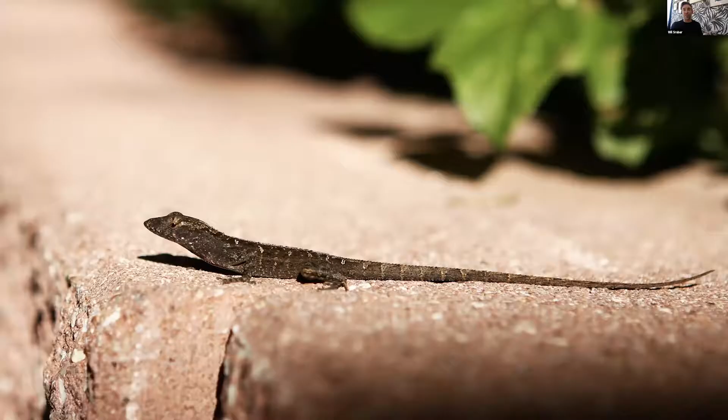I remember chasing lizards and making them shed their tail, so their little wriggling tail would be left behind to evade me, the predator. So I was always very fascinated with nature and how it has evolved these instincts and responses, especially, like I said, in times of these acute crises.

So I had a very rural upbringing, but it was the skyline of Houston that really inspired me to become a structural engineer. I remember going to baseball games with my dad at the Houston Astrodome and just marveling at how women and men can build such magnificent structures. So I was hooked with my first baseball game.

And this really kind of came full circle. One of the first projects I worked on as a practicing structural engineer with Walter P. Moore, which is a structural engineering firm in Texas, was the Dallas Cowboys Stadium. So it was a really nice return to my roots and my inspiration for choosing this as a career.

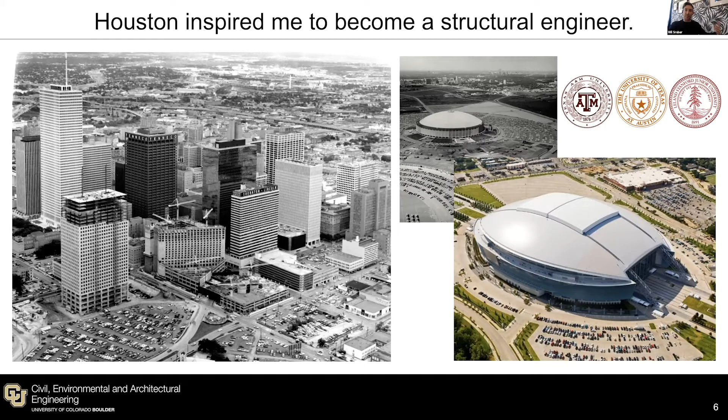When I got a bit older, I moved into concrete jungles. So this was the first time that I really came face to face with other people that didn't have rural upbringings. They lived in cities their whole life, and it was really a light bulb moment for me that I was the generation of my family that urbanized, that moved into cities.

And I just remember seeing, we have this image here of Central Park in New York City too. It came as quite a shock to me that what was the built environment was very separate from what was the natural world. And this is a very clear example. Humans were just so separate from nature, which was quite foreign to me.

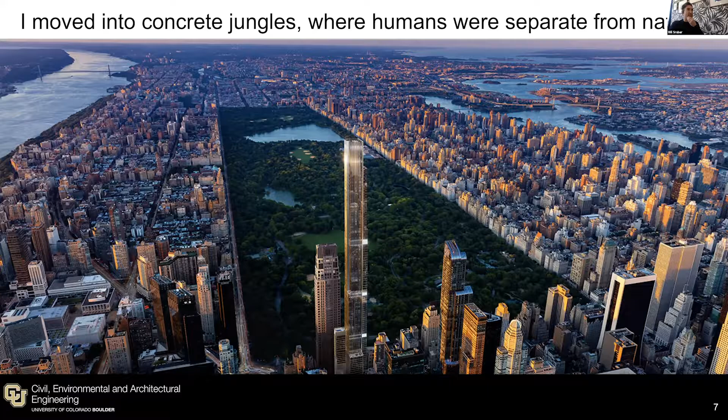So since moving to these cities and beginning my professional career, I've always really questioned that convention. Why are humans so separate from nature? Why do living things grow, regenerate, and adapt, but buildings do not? They're quite static and sterile. And what can we learn from our fellow species?

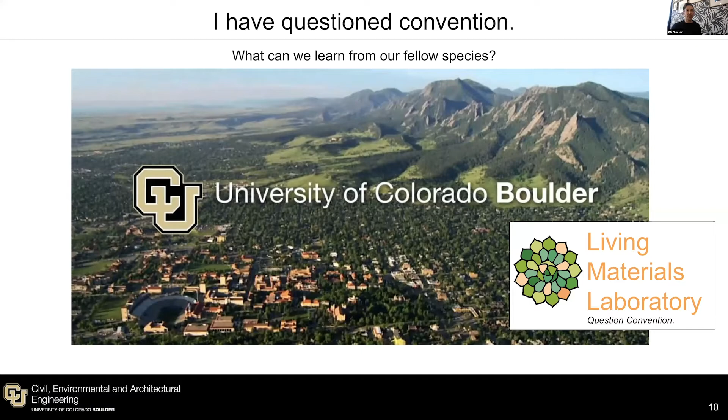So at CU, I founded the Living Materials Laboratory, and my group engineers biomimetic and living materials for the built environment. So we integrate aspects of synthetic biology with traditional polymer and cement chemistry to create responsive, adaptive, living materials specifically for the built environment, so for buildings and for infrastructure.

In order to do this, we work with a variety of very talented collaborators at CU and even beyond CU. And everything I'm going to show you in this presentation, I'm indebted to not only them, but also my students that you see here. My students come from a variety of different backgrounds, from architecture, physics, chemistry, civil engineering, microbiology.

And of course, this brings not only opportunities for inventing new materials, but also a variety of different challenges with communication, with perspectives, and really being comfortable with failure. I really owe it to my students for coming on this journey with me. We confront failure every single day in the lab, and occasionally we're quite successful, which is really exciting.

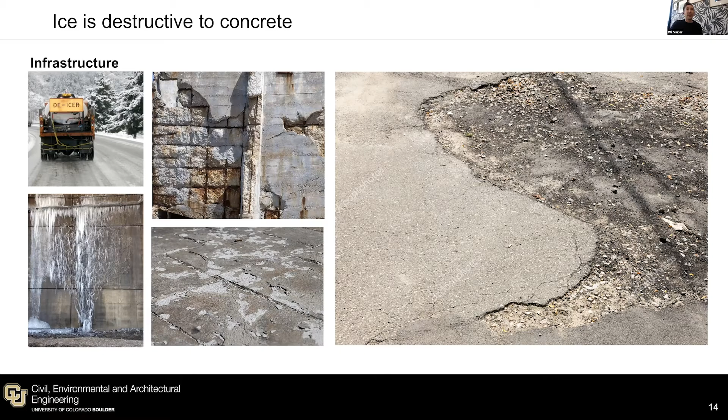Now, there are current prevention methods, but my lab views these as very non-optimal. For the better part of a century, we have put tiny little air bubbles in concrete to alleviate the pressure that builds up when water starts to freeze and ice expands. These are called air entraining agents. And this technology hasn't really changed in the last 70 years.

So if you were to look at concrete under a microscope, you'll be able to see these tiny little air bubbles that have been entrained throughout the microstructure, again, to alleviate that pressure.

So these air entraining agents are really good at alleviating this pressure, especially if you have more than 5% of air entrained in your concrete. It does really well. And so for freeze-thaw climates like Boulder, like Colorado, where we see a lot of freezing and thawing, this works quite well, but it has some downsides.

Number one is that air cannot carry load, so it inherently weakens the concrete. Number two, which can be of concern for departments of transportation, is that when you put in the admixtures to make the air bubbles, it can increase the time of set of the concrete and delay construction. And the biggest one, number three here, is that it increases the permeability of concrete.

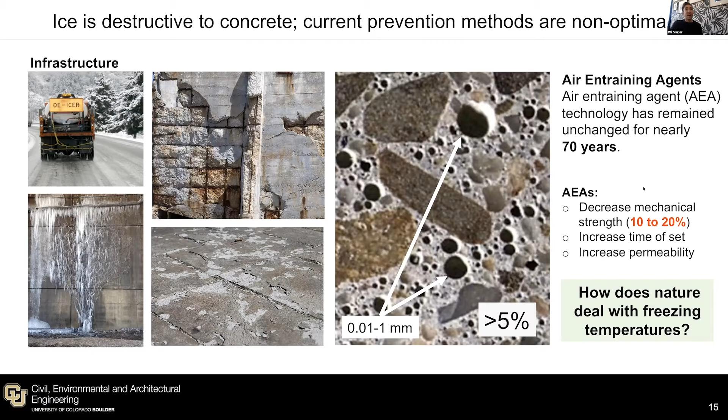We took a step back and said, okay, how does nature deal with this problem? We took inspiration from what are called ice-binding proteins. Now, ice-binding proteins are a class of proteins that are naturally occurring. They are found in a multitude of bacteria, fish, plants that thrive in sub-zero temperatures. And so what these organisms do is that they produce these proteins, and when an ice crystal nucleates inside of them, the protein binds to its surface to keep the ice crystal really small.

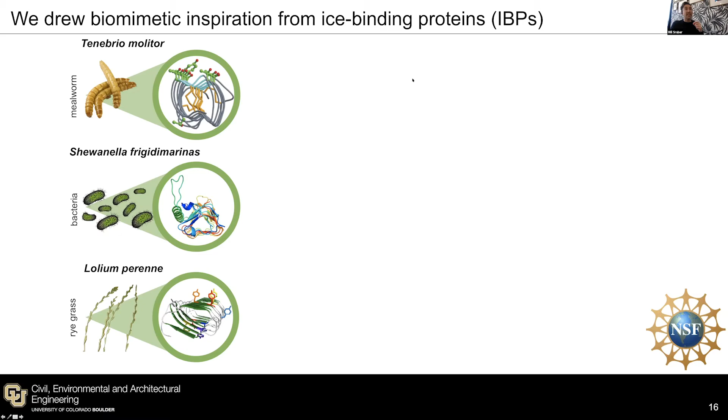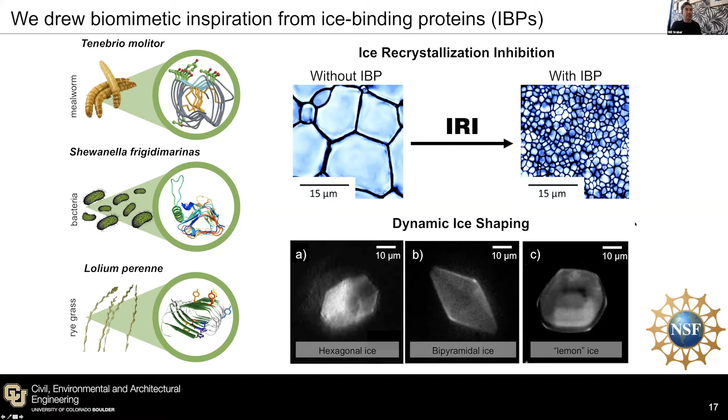The second mechanism we can observe is that when these ice binding proteins bind to the surface, they can change the shape of the ice crystal. So we get these really cool bipyramidal ice, or in most cases, with most proteins that we're looking at, we get this lemon-shaped ice, which is indicative to us that it is in fact interacting with that ice surface. So this is great. Why don't we take some protein and put it into concrete and see if it keeps the ice crystal small and non-destructive.

If you know anything about biology, proteins can get very unhappy when you take them out of their native environment. So a normal protein looks like this nice coil; it has primary and secondary structure, beta folds and beta sheets, and it can have some helices. But when you put it in a non-native environment, it can unravel and denature and even disintegrate. And some of those denaturation agents are things like pH. If you increase the pH, or temperature, or ionic strength, proteins get very unhappy.

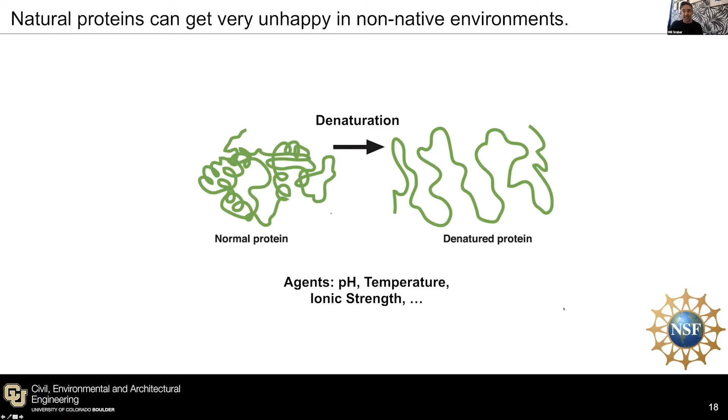If you know anything about concrete, you know that if you squeeze concrete and a drop of liquid comes out, the pH of that solution is about 12.5 to 13. It's very, very basic, high ionic strength. And so we thought, well, proteins probably won't be very happy in that environment, but we tested it anyway. So we took simulated pore solution of concrete, and we tested whether or not an ice-binding protein has this IRI, this ice recrystallization inhibition activity.

So this is the data that you would get. This is for a pH 8.9 solution without any protein. So what we do is we take a drop of solution from a prescribed height, we flash freeze it to get a very thin monolayer of ice. We put it on a cold stage and we watch the ice crystals.

And we can see the ice crystals at the very beginning, they're very small, and then over time grow into larger crystals. And so this is a sample, like I said, without any protein. So we see what we would expect to see, that larger crystals grow at the expense of smaller ones. And so this is just blank solutions without any protein.

And so we saw what we would expect to see as we increase the pH to higher and higher pHs, and we saw this ice recrystallization. When Elizabeth was my main PhD student on this project, when she loaded the sample with an ice-binding protein from an Antarctic bacterium, what we saw was pretty exciting: after 30 minutes, the ice crystals remained small, indicating to us that this protein maintained activity at pH roughly 9.

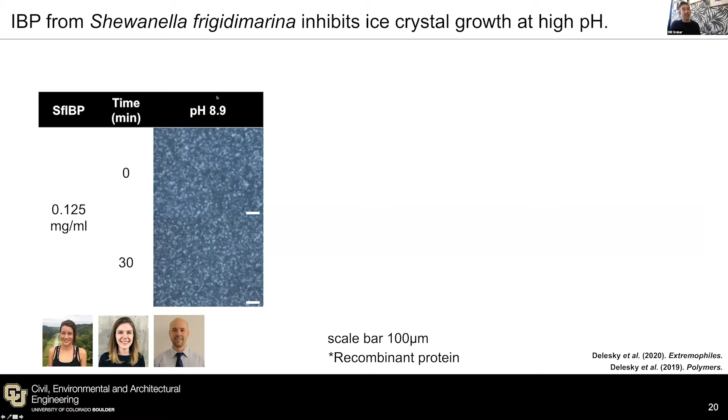We were exceptionally excited to see it maintained that activity at pH 12.4, pH 12.7, but then after we reached a certain threshold, what we proved in these papers is that the protein unraveled and then it disintegrated because the pH was so high. We also tested another ice-binding protein that we thought would be a little bit more effective in this calcium-rich, high pH solution, but we found the same thing.

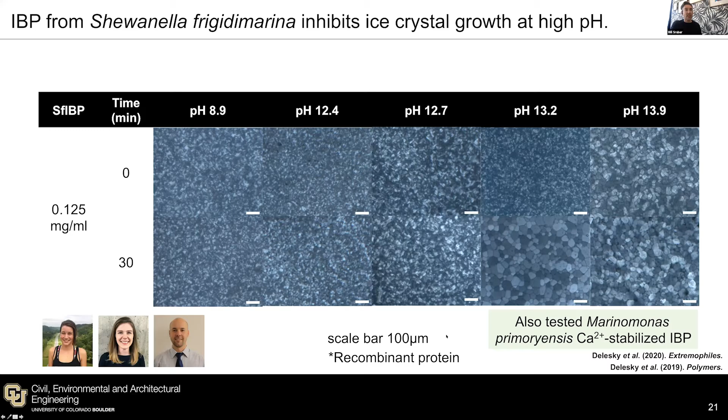So, even though it worked up to a pH of 12.7, it's still expensive. So we knew that this couldn't be a viable option to put into concrete. So we turned to biomimicry instead. So we looked at polymeric molecules that display the same ice recrystallization inhibition activity as the proteins. And in the literature, we found that polyvinyl alcohol was a polymer that displayed this activity.

The issue with polyvinyl alcohol was that it had really low solubility in water at high pH, which would not work out well for us. And it has what is called a high cryogelation potential, meaning that if you freeze and thaw it, it forms a hydrogel and wouldn't behave the same way as it would just dissolved in solution. We took note of PEG, polyethylene glycol, that had the benefits that PVA did not. The only downside with PEG was that it was not IRI active.

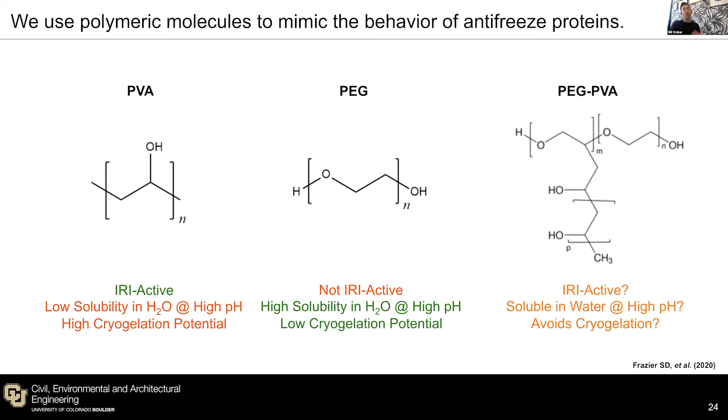So we thought if we combined the two into a copolymer, we would either get the best of both worlds or the worst of both worlds. And fortunately, because I'm highlighting it, we did get the best of both worlds. So we did prove, and I'll show you some data, that PEG PVA is IRI active at high pH. We can dissolve it in water, and it gets us the performance that we wanted. So PEG PVA displayed IRI activity, not showing the dynamic ice shaping, but it did that as well in these really high calcium-rich pH solutions, pH 13 solutions.

So over here on the left, we have a control sample after 30 minutes of incubation on the cold stage with no polymer dissolved in solution. And you can see the ice crystal grains are actually quite big. PEG alone at a low concentration and a high concentration didn't display this ice recrystallization inhibition, but PVA at low and high and PEG PVA at low and high concentrations did. And it kept the crystal size more than 50% smaller than the blank, the control solution. So we were really excited about this.

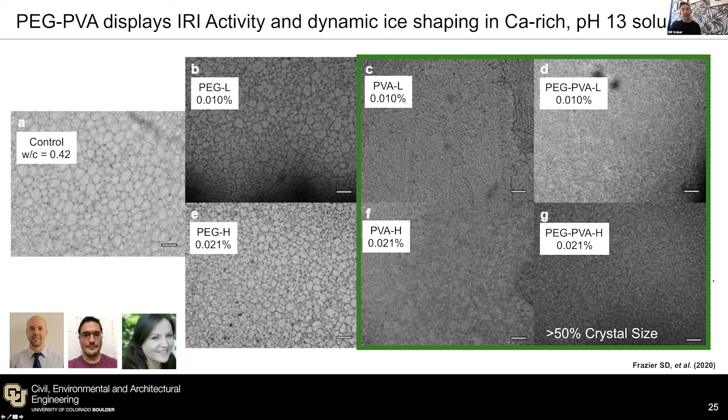And thought, okay, well, let's go ahead and put this molecule in cement paste and see if it resists freezing and thawing. So these are the results. These are microcomputed X-ray tomography images, basically an X-ray cross-section of cement paste samples that underwent freezing and thawing for 30 cycles. So on the left-hand side is the sample without the molecule. And then again, these samples here are with the molecules at low and high concentrations.

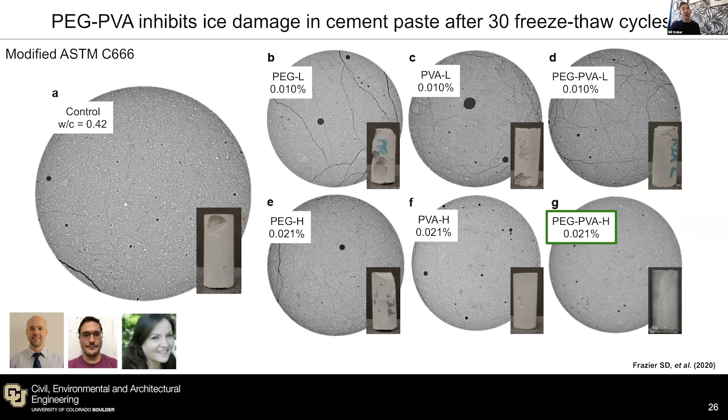And what we were really excited to find was that PEG PVA, when added at a slightly higher concentration, did exhibit enhanced freezing and thawing resistance compared to the control samples and all of the other samples that had the molecules in them. So this indicated to us that we should go ahead and scale this up to full-scale concrete, which is what we did. So does biomimetic PEG PVA prevent freeze-thaw damage in actual concrete? Mo, my PhD student, and Shane recently found the answer to this question.

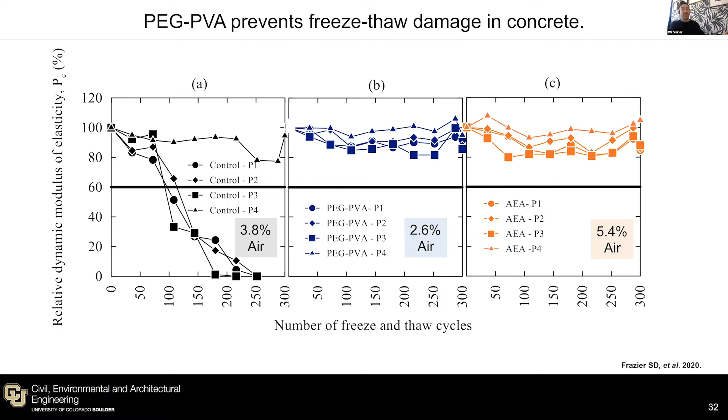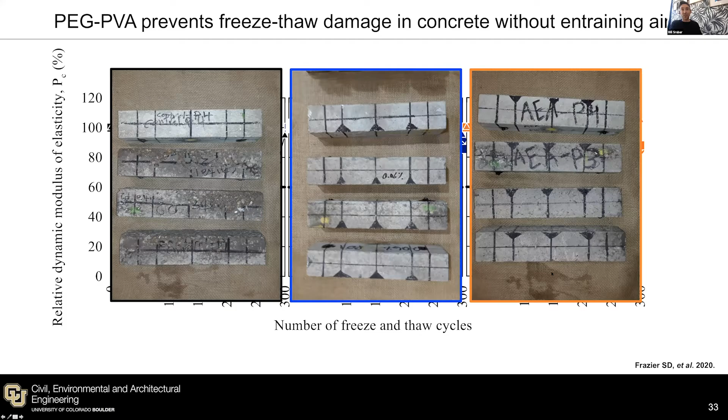We're really exceptionally excited about not only the applications of this technology to concrete. Oh, by the way, these are kind of the visual images of the samples where you can kind of see our PEG PVA concrete really looks identical to the air entrainer. I'm going to skip this really quickly.

But we're really excited about applications of this technology to other industries. So food security, where we're having to store our food, warfighter performance in very cold climates, energy applications, creating anti-icing surfaces for enhanced efficiency of wind turbines, and even medicine. So when we cryopreserve organs and tissues, et cetera, freezing is certainly an issue in all of these industries.

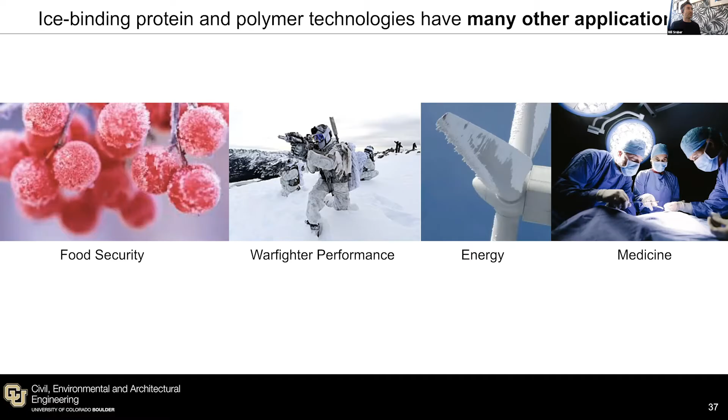The next project I want to highlight is our work with programming biology to make materials for us with very tunable properties. Now, the impetus of this work came about as my group was reviewing self-healing concrete. Many of you may have come across self-healing concrete in the literature, but microorganisms have been put into concrete to impart a self-healing characteristic.

So the idea being that these microorganisms that undergo biomineralization, they make minerals, primarily calcium carbonate, that, when a crack forms, if these organisms are inside of the concrete, they would generate calcium carbonate and they would seal the cracks. There's an issue with this because concrete's a very aggressive environment, like I already said beforehand, and the microbes don't always survive at levels that we would need them to survive if we want them to be viable for decades.

But again, this concept of using microbes that biomineralize has been applied to the self-healing concrete field. It's also been applied to stabilize soils, and it's also been applied to densify recycled aggregates. So if we bust up old concrete and we want to use it as the rocks in new concrete, some researchers had looked at using microbes to help biomineralize and densify that aggregate to improve the aggregate quality.

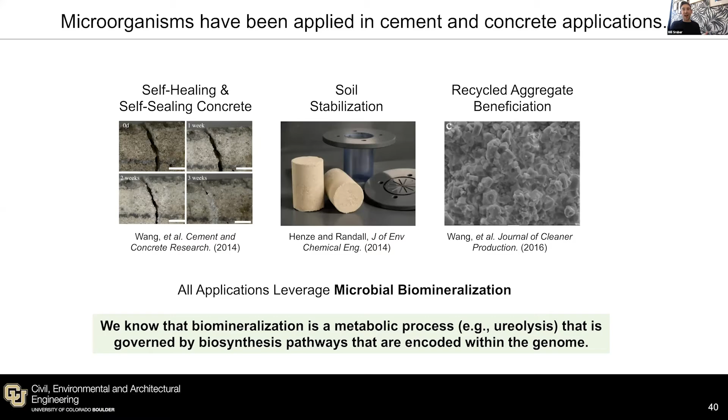Again, taking a step back, all of these applications leverage this process of microbial biomineralization. And we have, up to this point, relied on wild type bacteria that do this normally out in nature to perform this activity in these applications. But we know that biomineralization is a metabolic process that is governed by the biosynthesis pathways that are encoded within the genome of that organism.

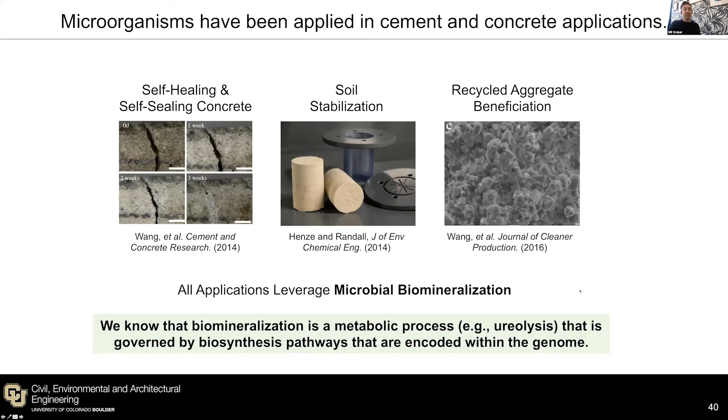So there's this grand opportunity for us that if we understood the genome sequences that enabled better mineral properties, we could really use that to our advantage for these and other applications. So yes, I'm talking about genetically modified organisms, but not for food production, but for engineering them to produce materials for us. So to do that, we have to sequence a genome and understand the genome.

And fortunately, the cost and time of sequencing a genome has plummeted over the last few years. And I'm just comparing this to Moore's law. Many of you are familiar with Moore's law, that processor speeds will double every 18 months. And just comparing that to the cost of sequencing a genome, it doesn't even follow Moore's law. It was much faster at reducing the cost over time.

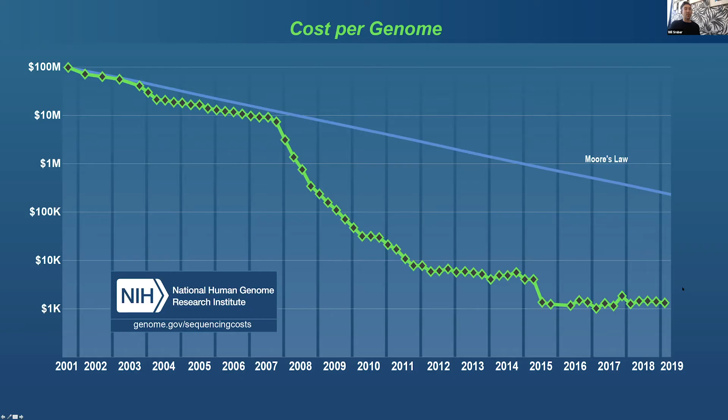So what this tells you is that, for a couple $100, we can have the genome of virtually any organism on Earth. And so it's now feasible to decode the genome. And now that enables us to design fragments of DNA to infuse those into organisms to make better materials for us. So since this discovery and since the plummeting of the cost of sequencing a genome, synthetic biology toolkits have really enabled biofabrication of a variety of bioproducts.

The definition of synthetic biology as a field is a field of science that involves redesigning organisms for useful purposes by engineering them to have new or enhanced abilities. Up until this point, organisms have been used to make fuels or chemicals, even pharmaceuticals. So most insulin is made by hijacking the metabolic process of microorganisms to get them to produce insulin for people with diabetes to use.

And only now are we really scratching the surface with how can we harness these processes to make better materials for us. A lot of companies have sprung up trying to use synthetic biology and microorganisms to make a variety of different products. I'm highlighting Bolt Threads and Ecovative, who are looking at making building materials, so applications to the built environment.

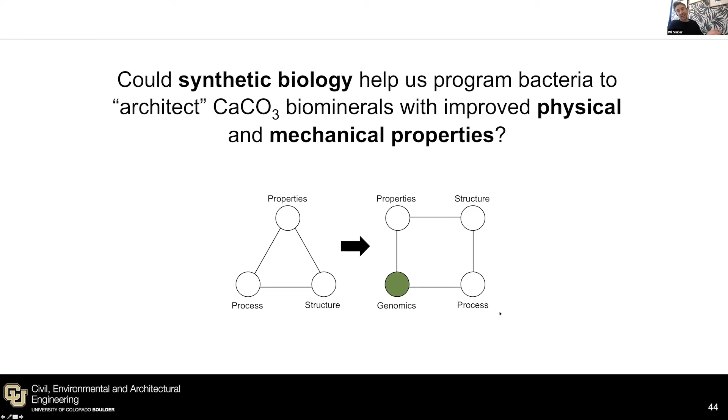So my highly interdisciplinary collaborators and I asked a question. Could synthetic biology help us program bacteria to architect different biominerals with different physical and mechanical properties? So can we really biologically architect minerals by controlling the DNA? And what we're getting at is moving away from the classic material science triangle of processing, structure, and properties, really infusing genomics and DNA manipulation into that entire process.

So we conducted an experiment with a native biomineralizing organism, S. pasteurii, which has been used a lot in self-healing concrete literature. And then we engineered 2 strains. So working with my very talented collaborators, we took E. coli and we integrated either a single copy or multiple copies of the urease gene cluster, which ultimately governs biomineralization in these ureolytic organisms.

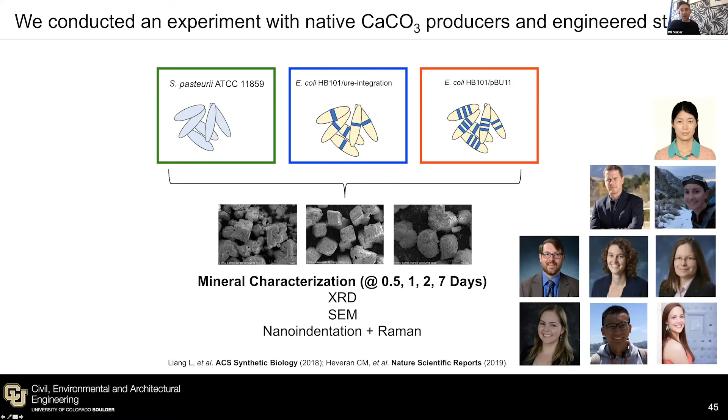So we imparted that ability to E. coli, and we wanted to look at the differences in the DNA. So, is putting in multiple copies of that gene cluster better, or is a single copy better, and how does that compare to a regular native producer? So we grew these in their respective media conditions. They made minerals, and then we looked at the minerals and we analyzed them.

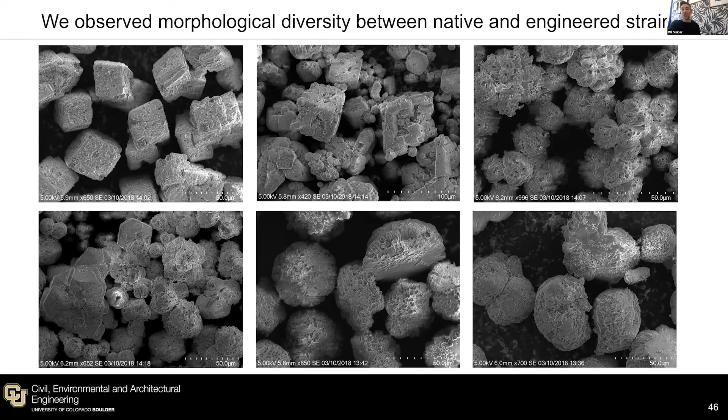And what we found was just this crazy morphological diversity between the native and engineered strains in terms of their ability to architect different minerals. So from very rhomboidal to very globular, and the sizes of the crystals also varied. So what we ultimately concluded was that genetics, nature certainly plays a role in the size and shape and even the mechanical properties of these minerals.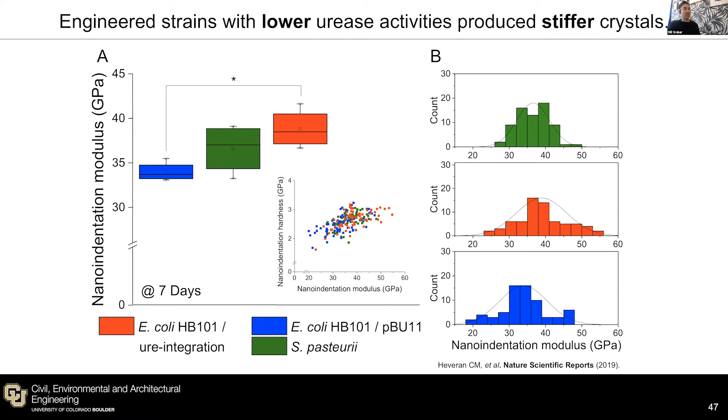This finding was really intriguing to us since it speaks to the potential of genetically encoding the architecture of building materials and even possibly buildings into the DNA of organisms. Of course, we have a long way to go, but nature creates these very complex, hierarchically ordered materials. Just think of seashells and coral. And for the first time, we are now able to harness that potential and control the hierarchical growth of those materials by manipulating and controlling the DNA. Again, it might seem like science fiction, but the reality is a lot closer than one might think.

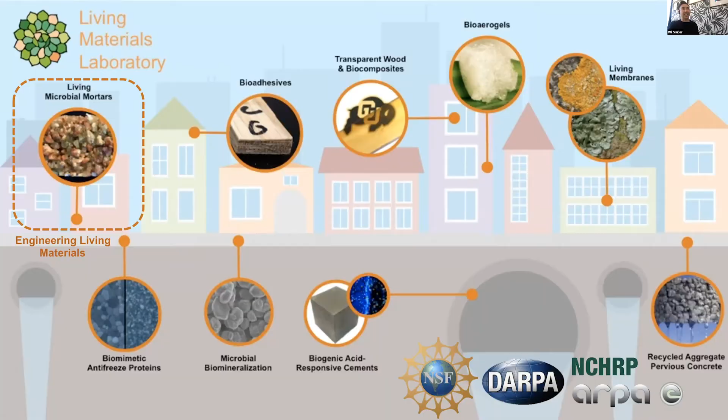So the final project I want to highlight is very related, and it's our work in which we are bringing building materials to life. So my lab and my collaborators started to rethink self-healing concrete. Like I said, self-healing concrete is a concept in which we take regular concrete and we put this biomineralizing organism into that cementitious matrix. But that harsh environment is not conducive to prolonged cell viability. And in fact, no researcher has been able to prove that more than 10% of the initial inoculum of the bacteria survives more than 7 days.

So it doesn't seem like concrete, which we expect to last decades, if not a century, today, that this is a viable path forward. So we asked, could we leverage these biomineralizing organisms to create an engineered living cementitious composite by giving it the right environment by which to thrive, to make minerals, and even survive?

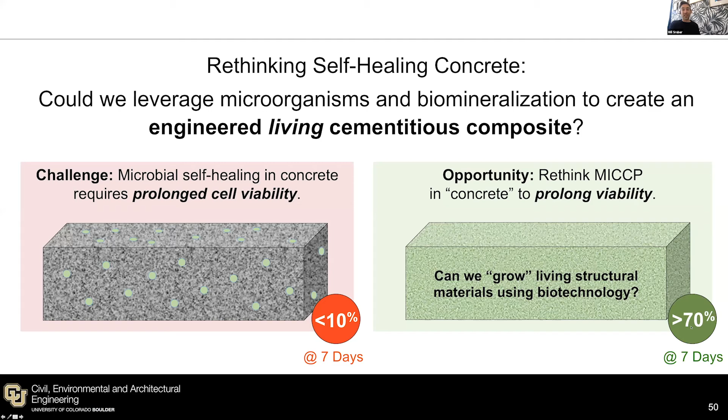So our goal was to grow a living structural material using this biotechnology and to keep it alive, have more than 70% of the initial inoculum survive at 7 days and longer. And this is what we came up with. So we took biomineralizing bacteria and we encapsulated it within a sand and hydrogel scaffold. And how we did this was we took sand, hydrogel, the media that the organisms need and the cells, and we mixed it all together.

And inside, as these organisms were growing, they were precipitating these biominerals that were helping to cement the sand particles together. There was also this hydrogel that was helping to keep all of the moisture inside of the material, especially once we cooled the material from an elevated temperature. Cells generally like to grow a lot faster the higher the temperature. But once we cooled the material, we formed kind of a jello around the cells that had all of the minerals inside of it and the sand.

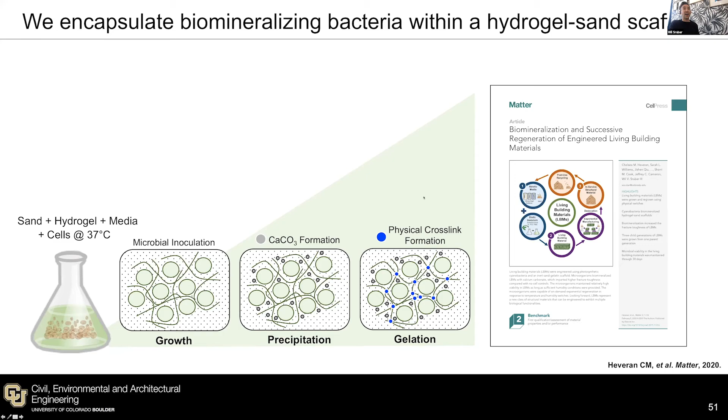And by the way, this is published in the journal Matter, if you want to read a little bit more technical details about it. But this is what it looked like. So this is post-gelation, right when we popped it out of the mold. And this material is just teeming with living bacteria that biomineralized inside, in between the sand particles. And then we were able to control the desiccation of that material and impart better structural properties with decreasing humidity. So there was this trade-off with keeping it gooey and squishy and keeping the bacteria alive versus drying it completely out and getting really good structural performance.

We're able to make very large samples. By the way, this work was sponsored by DARPA, so that's why there's some propaganda with this brick. But we are able to make very large samples, and we can make virtually any shape and any size. And I'll show you some more examples of this.

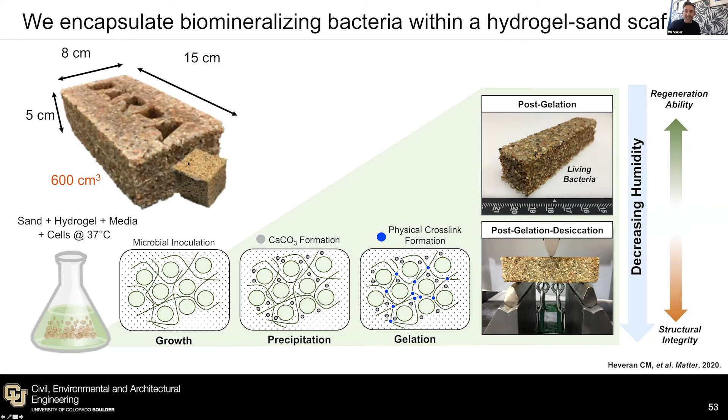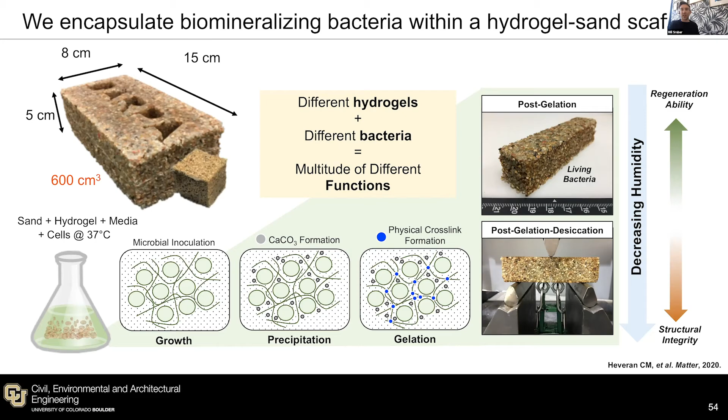But if you, again, take a half a step back and now view this material as a platform, what's exciting is that different hydrogels and different bacteria that we can encapsulate could impart a multitude of different functions to otherwise inert building materials. So one thing that we've been playing around with was encoding secret messages, because certain bacteria will fluoresce under different types of light. And so if you pattern them appropriately, you can start to display secret messages that can be interpreted under different light conditions. Or you could impart bacteria that sense and respond in other ways, maybe sense chemicals or toxins in the air and then impart something back to neutralize it.

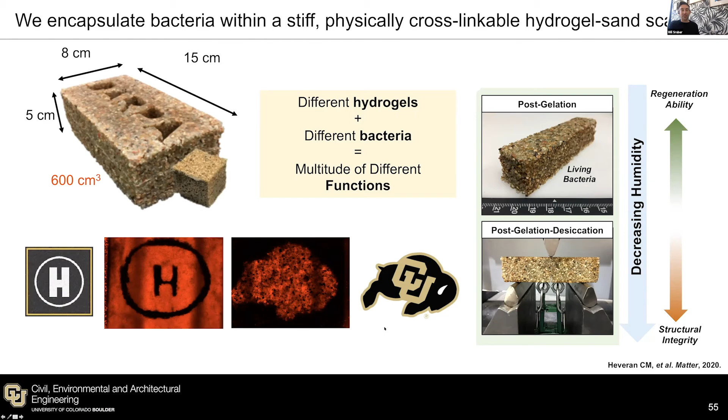We've looked at photosynthetic organisms that could impart enhanced CO2 sequestration in service. So, while we have this initial, what we would consider a platform material, we just see this as a tremendous starting point for engineering other types of living building materials with a multitude of different biological functions.

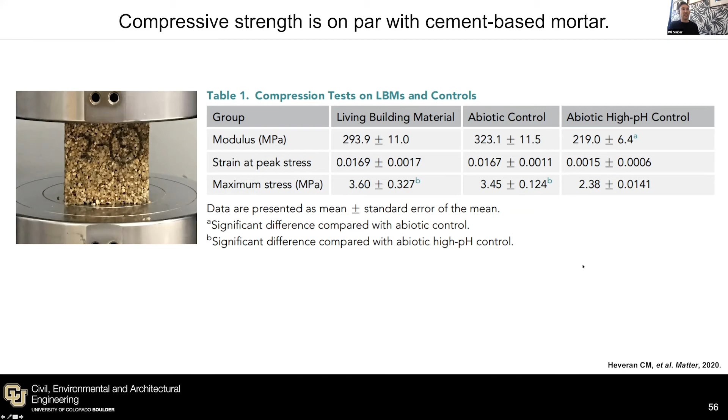This is for my civil engineers in the audience. The number I'll point out is the strength of the living building material, which is about 4 megapascals. If you're comparing the compressive strength, it's on par with a cement-based mortar, so the mortar that surrounds the bricks in everybody's house. So not ultra high strength concretes, but also not trivial in terms of the compressive strength we're able to achieve. I'm going to fast forward here.

And so one of the last things I'll discuss is that we actually regenerated the living building material and demonstrated in our publication that one parent brick we can keep alive and it can grow up to 8 child bricks without the addition of new bacteria. So what we did is we made one living building material, what we call the parent generation. We split that into 2. So we took 2 halves and we added more abiotics. So not new cells, but we added more sand and we added some more media.

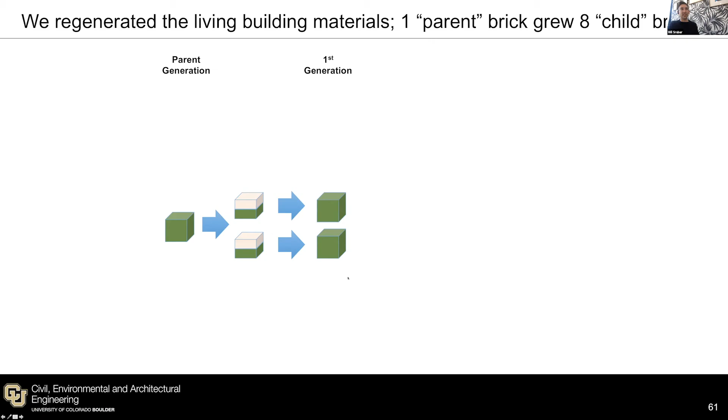And over a short period of time, the bacteria grew 2 full bricks in each of them. Again, bacteria grow at an exponential rate. It didn't take very long, a couple of hours to a day or two, to have a fully formed first generation of 2 bricks from one parent generation.

And we did that 2 more times. So we grew 8 full child generation bricks out of that one parent generation. And what we just wanted to demonstrate was a potential for this on-demand exponential manufacturing, especially in resource-limited environments.

I saw that someone submitted a question beforehand for me to answer about Mars, and this is a great opportunity to bring this up, because we really do think that this technology, sure, there's some applications on Earth in resource-limited environments, like out in the desert or in the Arctic, Antarctic, where there aren't a lot of raw material resources to make materials.

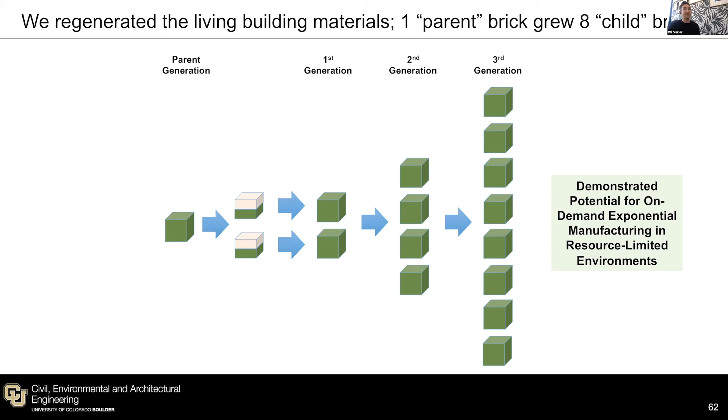But we also have our eye on the moon and on Mars, where we do have sources of sunlight and we have sources of CO2 even on Mars. So if you use photosynthetic organisms to grow materials for you, this is a great technological solution to make the materials and to make them at a very fast and exponential rate, which is pretty exciting.

This is just to show you that through the parent and child generations, the bacteria stayed alive if we kept the humidity above a certain threshold. So here is just a measure. Most probable number is a measure of how many bacteria are alive inside of the material. So obviously, if we kept the humidity relatively high at 100%, all of the bacteria survive through the parent, first, second, and third child generation.

The same was true for 50% relative humidity, which is even lower than what the humidity is in most buildings. We keep the humidity at about 55% and up to 65, maybe even 70%, kind of narrow window where humans like to be comfortable. And obviously, if we dried it completely out after the second generation, the bacteria ultimately died because they were super stressed from a lack of access to moisture.

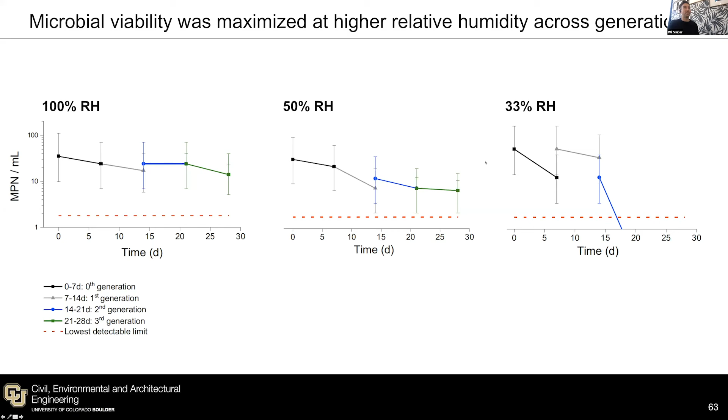And all the while, as we kept growing them through the generations, they were mineralizing more and more and creating more mineral. So this is just to show you that the quantity of the mineral on the left-hand side increases as you go across through the generations, which is super exciting. The bacteria were not only alive, but they were functional in helping us create the biocement.

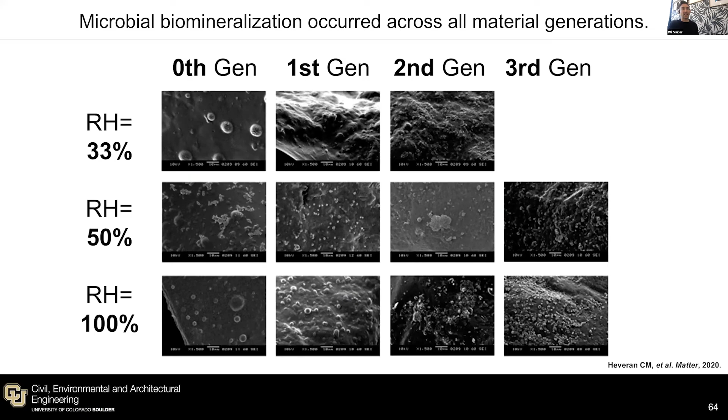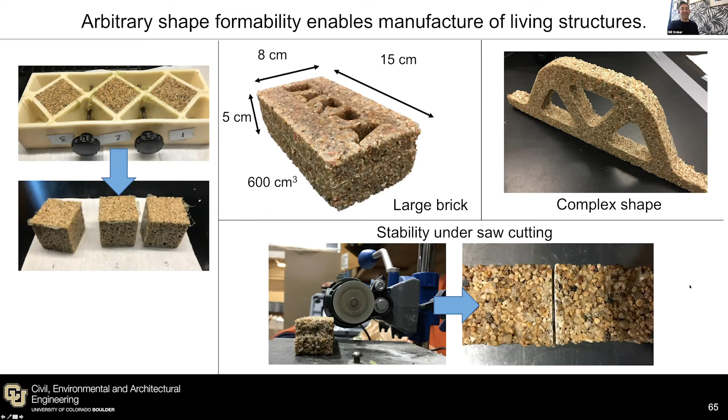So yeah, we're able to make a variety of different shapes and sizes. That's not necessarily the limitation. We've experimented a lot with 3D printing and have plans to do more demonstration projects related to that. A civil engineer did not necessarily make this shape because it's not something that we would make, but it's to demonstrate complex shapes that are achievable with the material.

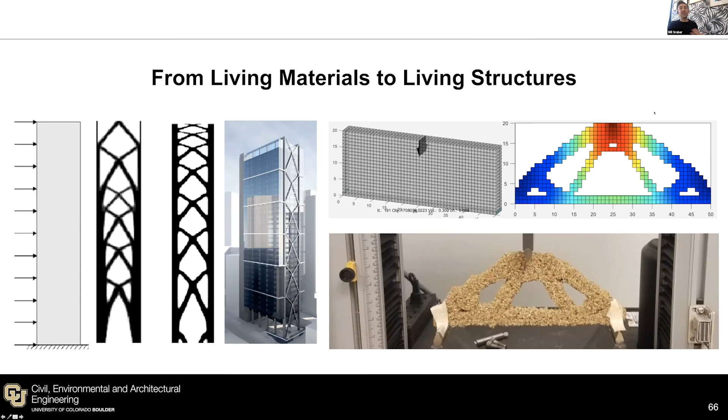And this toys with this idea of going from living materials to living structures, because any structural engineer will tell you that efficiency really comes not only from the material you use, but the shape in which it takes. So if we can better understand the loads imparted on the structure and the material properties, we can design the most efficient shape for that application.

My dog is very excited about topology optimization, so apologize.

But we've gotten a lot of press lately, both me and my collaborators. We're really indebted to the New York Times and to even Science Friday and NPR for really helping us spread the word on our technologies.

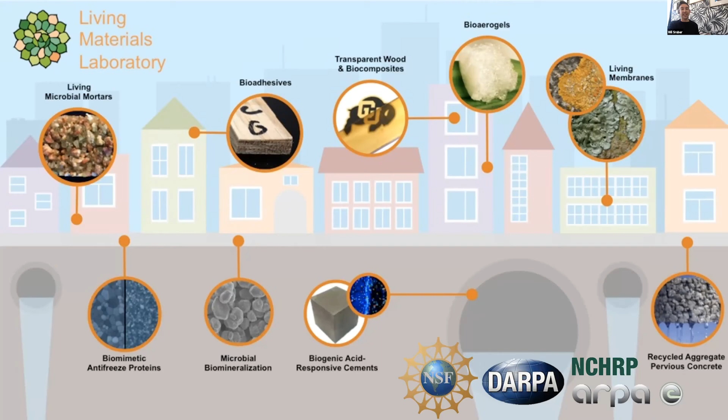So this is just a glimpse in my view of the world. I really do think it's an exciting time to be an engineer. I think it's an exciting time to be a civil engineer, especially one that has an interest in interdisciplinary work. Because I think, in general, we as engineers are facing unprecedented challenges, looking at increasing strength and frequency of disasters to social inequities and to climate change.

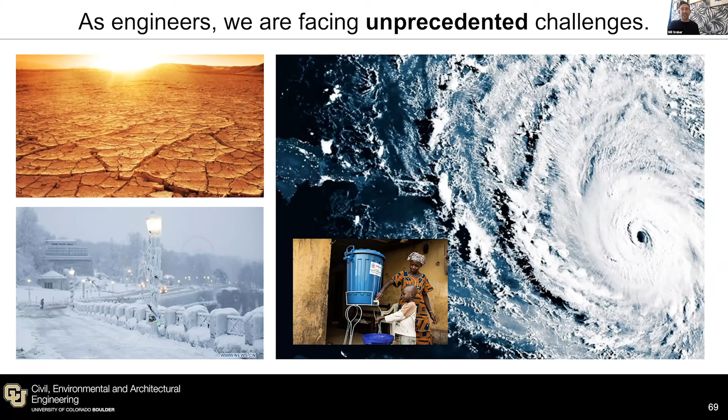So I really do think that, if we look to nature, we're not the only species that's having to adapt to climate change. And I really do think that if we pay more attention, we do have a lot to learn from each other.